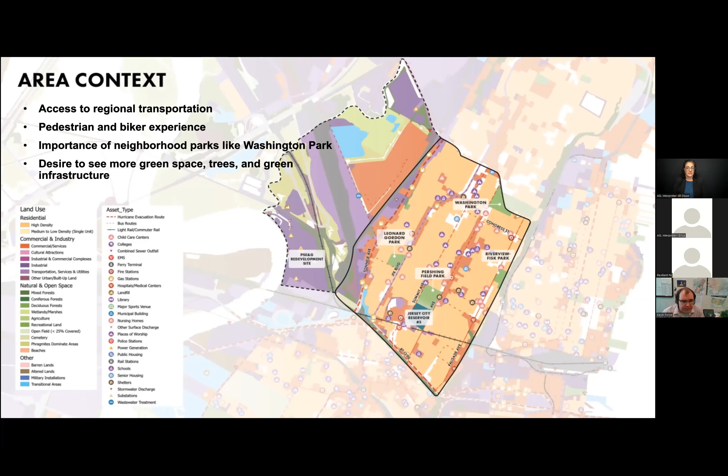Is there anything about these two neighborhoods, anything else important that you think we should highlight about them? Feel free to mention it in the chat box, and we can talk about it a little further.

So, to talk about the risk context of our neighborhoods here: we're susceptible to both rainfall flooding and coastal impacts. You can see that for the western part of the neighborhood along the Hackensack River, there is somewhat of a potential for storm surge flooding.

However, due to the natural slope and elevation of the area, the flooding doesn't extend too far inland. It seems to stay mostly west of Route 440 and Routes 1 and 9 — so don't go to the Hudson Mall when there's a hurricane — but the eastern neighborhoods, thankfully, don't see too much of that.

You'll also notice that the Bayfront redevelopment is not marked as being so susceptible to flooding, and that's because it's going to be intentionally elevated above the future flood level.

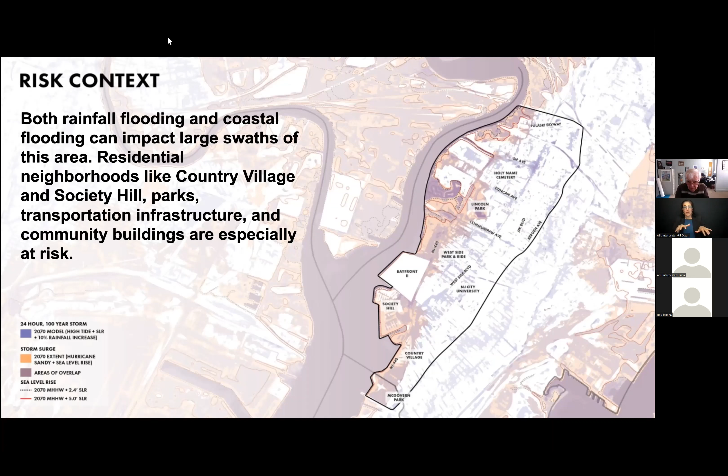But if you take a look at the more blue-purple color, you'll see that a lot of the roadways throughout the neighborhoods are susceptible to flooding from rainfall events, so it's definitely important to keep that in mind and target our infrastructure appropriately.

Similarly, with the Jersey City Heights and Meadowlands portion, you'll see that storm surge will really affect the lower lying portions along the river.

And Jersey City Heights — in the name we have 'Heights,' so you think of it as an elevated place — but even there you'll see it is susceptible to certain low-lying areas, where our roadways and other transportation corridors can flood. So it's definitely important to consider the effects these can have and ways to prevent it.

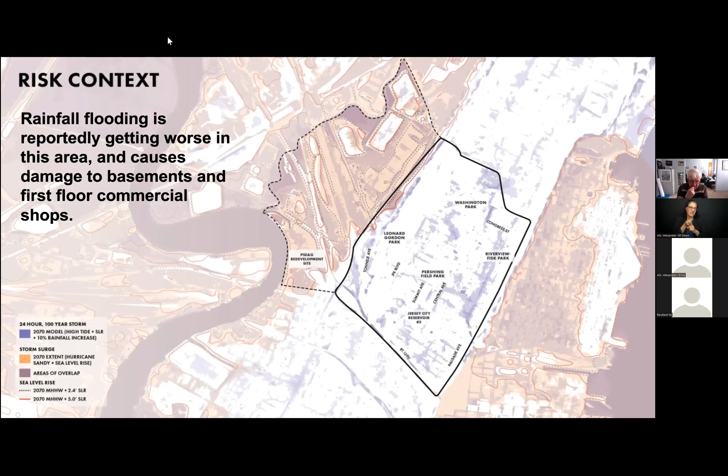So we'll introduce here the different scenarios: individual initiative, shared responsibility, and regional coordination. We're going to present some solutions that can be provided through each of these scenarios.

I guess we'll pause for a moment if anyone wants to share some thoughts about the area and the risk context, to make sure we're not missing anything. Then after that, I'll turn it over to Greg to run through our potential actions. I see a hand from Bill.

Yes, well, I put a question in the chat about Bayfront, and Kevin, you just said that area will be elevated. So how much will it be elevated, and how expensive is that going to be? And what about the whole area that's being redeveloped by NJCU?

Bill, I'm sorry, I don't have that off the top of my head of what the actual elevation for Bayfront will be. I know it's included in the Bayfront redevelopment plan, and I can follow up with you afterwards and get you the exact elevation if you need it. But I do know that it is going to be factored in from the start before it becomes developed. They're already going to do that elevation of the site there.

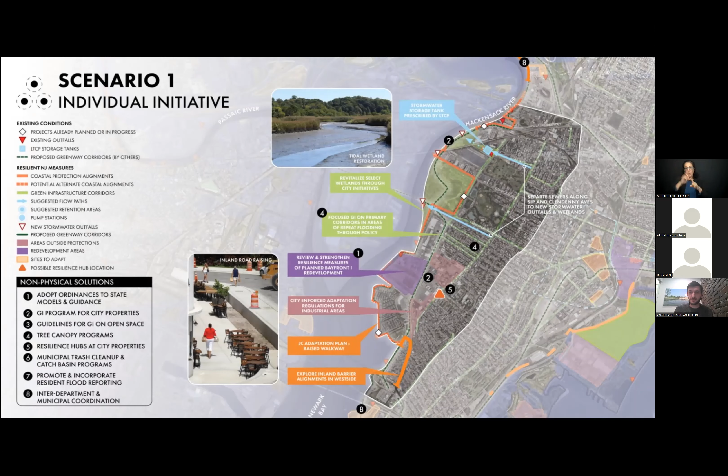When we get to the Heights, the city has less jurisdiction within the Meadowlands area, but we do still recognize that there is a high flood risk there. So similar to the areas left outside of protections a bit to the south, we would propose the city be the arbiter and the main driver of helping those industrial areas adapt to sea level rise, inundation, and rainfall flooding.

In the Heights, since most of the risk is limited to rainfall flooding, we see some main green infrastructure corridors, along which we propose both drainage and green infrastructure improvements - drainage more so in some areas, indicated with the blue arrows.

And again, in the Heights, there is at least one unique feature that will help us immensely, and that is Reservoir Number 3. So proposing, within the wheelhouse of the city, expanding the capacity and general workings of that reservoir to absorb more of the rainfall runoff.

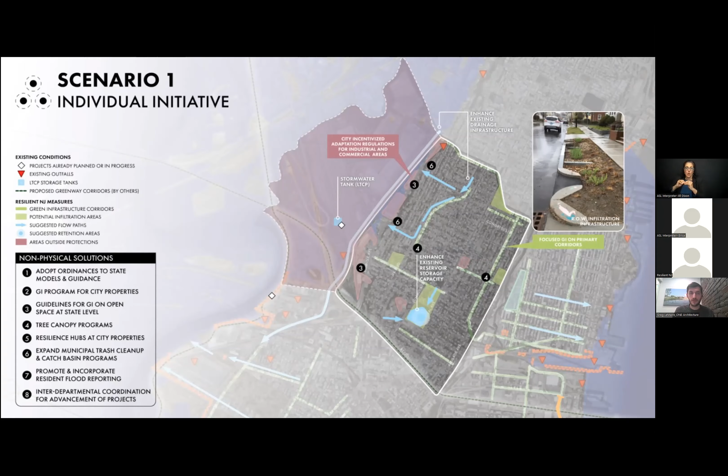So as I stated, here are some of the main changes you can see in your neighborhood with these interventions. You'll see as we step through the other scenarios that these feel a bit more limited, essentially because we're working within the existing system, so we don't want to fully disrupt parks, streets, sidewalks, and businesses.

So we have things like spring dams and improved water conveyance that can be built into existing systems, also possibly in conjunction with some of the Greenway projects, which becomes more explicit in other scenarios, building resilience into, say, the Hackensack Greenway project, using existing parks and open spaces, reconfiguring them slightly to have more retentive capability.

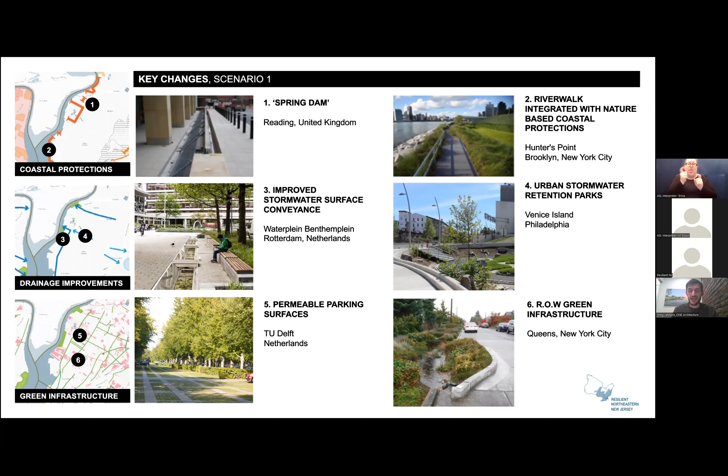So what does all this mean? Here we are breaking down, a bit wordily, the actions and considerations we should be thinking about when choosing a scenario or actions from the scenarios to go forward.

Within the coastal protections, it is left to the city and agencies, but there are many areas that are potentially left outside of those protections, particularly during a strong flood event. So the key considerations are a bit of a mixed bag, but the main issue is, are we okay with these parts of the community being left out of the alignment, and are we okay with some critical services in those areas being cut off during storm events?

In drainage improvements, some of the main factors with working within the existing system are that this work can be easily started and implemented by city agencies that already have many sewer separation projects going on. We also recognize that the LTCP is not necessarily built for additional resilience, but more so for CSO events, so potentially enhancing some of those projects within the LTCP to contribute to overall resilience as well.

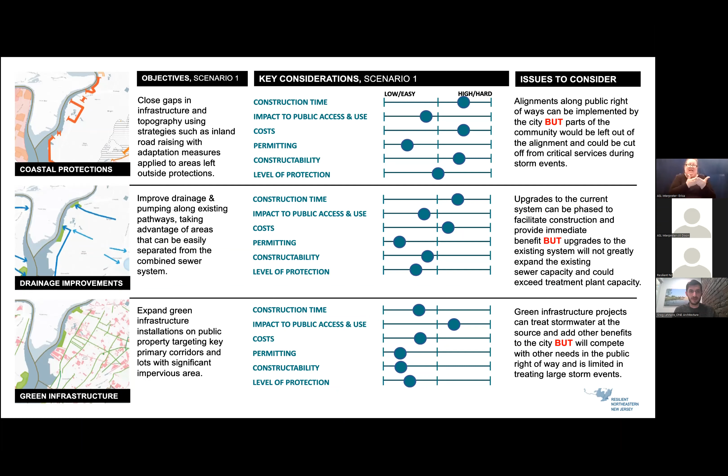So now I'll turn it over to Mary to talk about the non-physical solutions. Great, thank you, Greg. So in addition to those physical strategies that Greg walked through as part of scenario one, we've also identified a range of more non-physical solutions, more like policies and programs that would complement those physical solutions.

In terms of providing coastal protection, there are some areas in this scenario that would be left outside of those coastal protections, like Greg mentioned. So this would be an area where policy or programs could be used to address the resiliency and risks that exist, such as incorporating higher standards into development or having targeted outreach and technical assistance to property owners to advance retrofits for existing buildings.

And then on the drainage improvement side, policies and programs like trash cleanups and catch basin programs, which came up in the chat earlier, is something we were looking at here, as well as larger measures like developing a municipal stormwater utility to further incentivize green infrastructure across the city.

And then also on green infrastructure, measures like tree programs and requiring green infrastructure on public open spaces, those sites within the control of the city, would be a key component of scenario one. So you can see we've also looked at a range of other different types of programs and policies that would also complement, but those are the main ideas we wanted to highlight for this discussion.

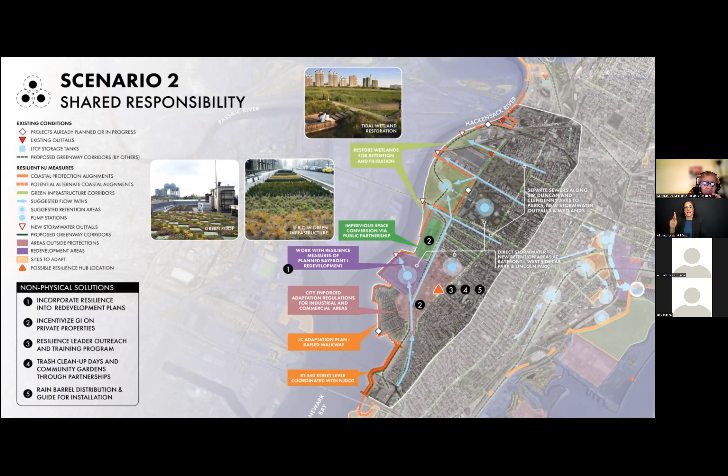For example, along the coast, where we had the raised walkway on Country Village, ending at 440. This was partially because it was originally proposed there by Jersey City, but NJDOT essentially said 440 is too close to the water and they don't think it can be done. So through a close partnership with NJDOT, not just trying to tell them what to do, we would propose reconfiguring that area of 440, potentially raising it or adding a flood wall or offshore structure, which would also be incorporated into the Hackensack River Greenway running along 440 there. In the interest of time, I'm going to do this one a bit faster.

Here we would also propose partnering with the property owner of the PSE&G site, potentially turning that critical site at the nexus of Jersey City and the Meadowlands into a retention park, somewhere that can use and celebrate the water while protecting it, creating an asset in an area that sorely lacks one. There is also a substation on this property that we would want to protect as key infrastructure.

In the Heights, where it's more about rainfall flooding, we would propose a distributed network of retention within the parks. Retention areas can be underground, under parking lots holding excess water, or open air like a retention pond or reservoir, directing excess stormwater to these areas through partnerships.

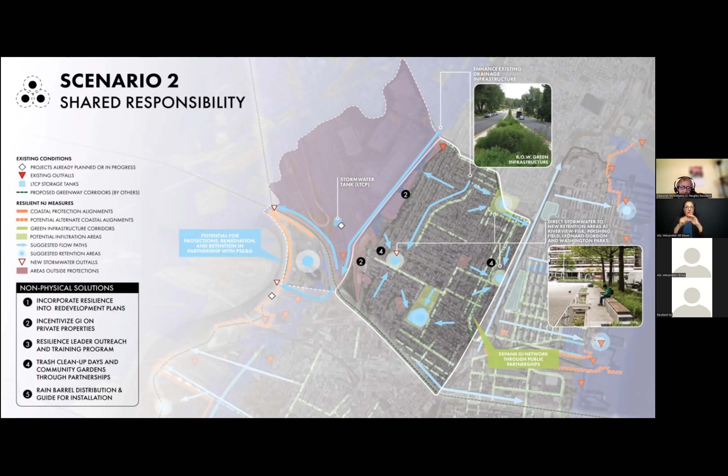Not all of these parks are city owned—there are also county and state parks within here. So this involves partnerships not only among city agencies, but also city, county, state, et cetera, working together towards one shared goal: shared responsibility for the problem.

So what might these things look like? At the coastal protections, we can see examples showing riprap, rock revetments, and areas that can be more built up with more funding. Partnerships are essential for creating alignments along the coast, as no single entity owns all of the coastal land in any of these areas.

You can also see something like a raised and reinforced roadway in conjunction with NJDOT, using our existing infrastructure and disrupting it as little as possible. Then for drainage improvements, again more funding and partnerships for slightly larger projects, looking at them within these park areas.

You can see some examples where a boardwalk is built over retention areas. This also helps filter the runoff before it goes out into the waterways.

Again, a partnership with someone like NJDOT would allow for using the right-of-way green infrastructure within these larger streets like 440, putting in something to slow and filter the water and get it out of the CSO system as much as possible.

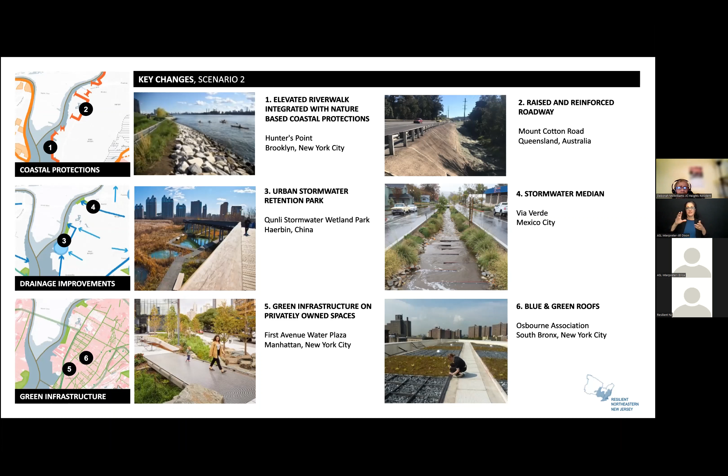And then lastly, on green infrastructure, opening it up to private properties through these other partnerships, we can see public-private parks and private plazas that are strictly for resilience purposes but also add the co-benefits of creating park spaces. More importantly, this opens up the possibility of green and blue roof programs on larger roofs, particularly in the industrial areas and some of the larger retail areas within the west side.

So we'll do this a bit quicker too. The coastal protections that we just talked about shift us a bit more towards the high and hard side. Again, we would have partnerships as a potential relief for that, for funding and logistics.

As it says right there, the issues to consider: extending the protections, which also would leave no one out in this situation, as we would coordinate with the property owners to fill in gaps. It requires a lot more coordination with agencies, property owners at all levels, but that is the thrust of this scenario. Drainage improvements here, again, a bit of a mixed bag.

They get a little bit more costly, but the level of protection goes up. The potential issue to consider here has a lot to do with funding and coordination for the benefits of the scenario to be realized.

Green infrastructure, again, will tend to be on the cheaper side, but will have less of a meaningful impact on larger events. And not only that, once we start multiplying out these green infrastructure projects on public property, private property, et cetera, that's a lot more assets that need to be maintained. Similar to the catch basins and the leaf issue that Deborah was just talking about. There's a greater number of inspections, a greater overall coordination needs to be put in place there as well.

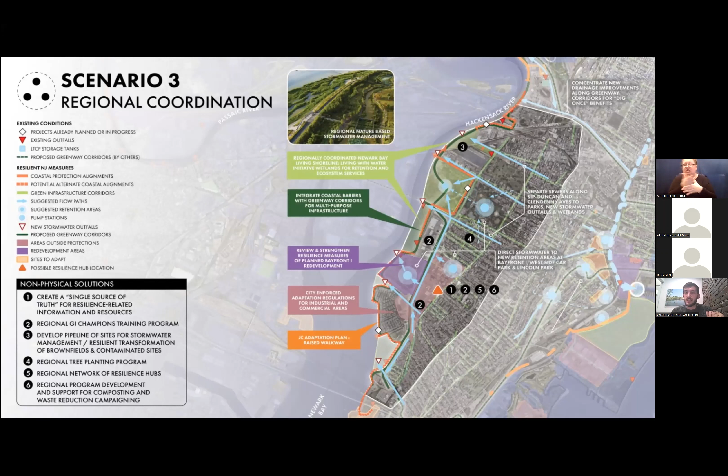We know that wetlands help clean water and filter water on its way back out into these water bodies, which will help the whole entire region have cleaner waterways as a whole. Because of the regional nature, we can expand the drainage a bit through more funding, coordination, and shared expertise.

And similarly with the green infrastructure on streets. Up here, on the Meadowlands side, we again have the potential to utilize that site and the PSE&G coal site. There are also two greenways potentially proposing enclosing the site physically, the Essex Hudson and the Hackensack River. If we can utilize those greenway projects and implementations, we really like the concept of dig once. We want multi-purpose infrastructure with co-benefits for people, nature, and most of all, city resilience.

In the Heights, we have similar retention areas that hold water, maybe less water or for less time, but in general, to go along with the Greenway integration, we direct water to the embankments to the south, which would help create new pathways for the water, somewhat more natural pathways where it wants to go, as that is a railway.

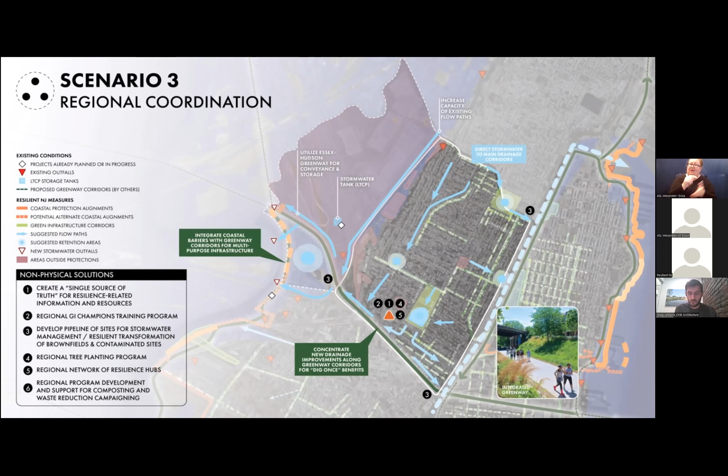We can go through these quickly. Again, the infrastructure scales up a bit here, and we can see more integration of public spaces, etc. The regional coordinating entity would again work with the cities but have a lot more resources for these things to be possible, similar to how we as Resilient New Jersey, or Resilient Northeastern New Jersey, have a larger picture and greater collective expertise.

We can see something like floodable public infrastructure, an example being Domino Park in Brooklyn. Things like stormwater conveyance and retention, and wetlands at the coast, can also be expanded. These are very aesthetic views that we would propose along the greenways, which again would begin to reconnect this entire region that has arguably been split up by infrastructure for decades.

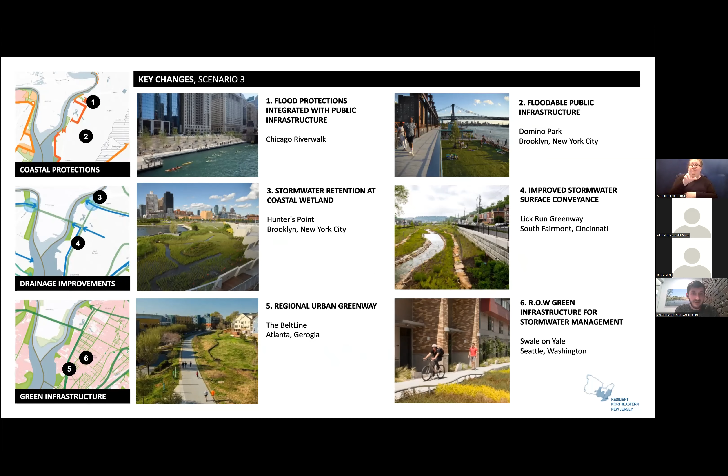So looking at this, obviously this coastal protection running up the whole entire coast, leaving no one out, integrated with co-benefits, gets a little pricey. The key considerations skew high and hard, but it does offer the greatest level of protection. It would require extensive coordination, but that is the thrust of this scenario.

Looking at drainage, again, we just talked about a lot of this. It does get into the high and hard side of all of our metrics, and required land use changes for surface conveyance, managing redevelopment sites and the private sector would all be an added wrench in the gears.

And then lastly, looking at the green infrastructure, there would need to be a concerted effort to actually get these wetlands, this potential Newark Bay living shoreline project, off the ground. There would need to be changes to existing uses, and some things are a bit more construction intensive, but we do see the benefits as greater again.

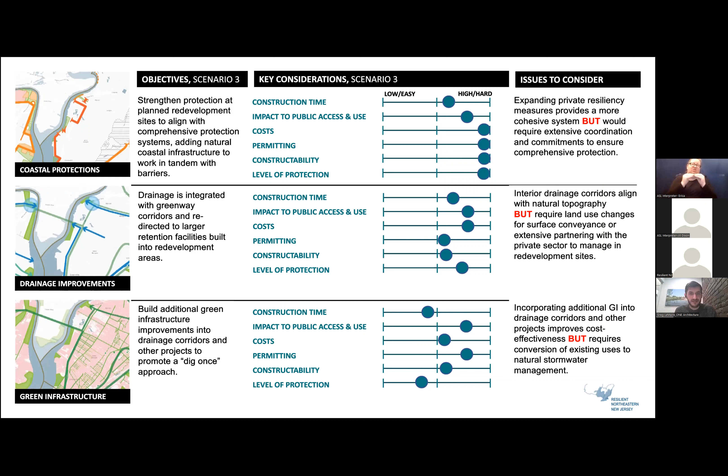Thanks, Greg. So on the non-physical solutions, the name of the game here is regional coordination. One of the policy and programmatic recommendations we have would be to actually continue the Resilient Northeastern New Jersey program, to continue to build on the momentum of this planning process and continue to implement the plan.

We also think that a regional infrastructure coordination council will be necessary to help maximize resilience and planned infrastructure improvements, as well as limit disruption to communities. With this regional approach, establishing more of a regional network of resilience hubs in partnership with community-based organizations and municipalities would allow resources to be shared in times of disaster. So really, it's about putting in place that regional scale governance and coordination that would be necessary both to advocate for the level of funding needed for this scenario, as well as to implement projects that span jurisdictions of agencies and municipalities.

There was a question in the chat about the second scenario being more expensive but having more benefits, and yes, that is likely true. We have begun to develop some very high level cost estimates for these scenarios, and they do scale toward being more costly as we go from the first scenario to the third. But we're also involving additional entities within the scenarios, so those costs would be spread out over multiple entities as well, coming from a variety of sources, and also coming with greater benefits.